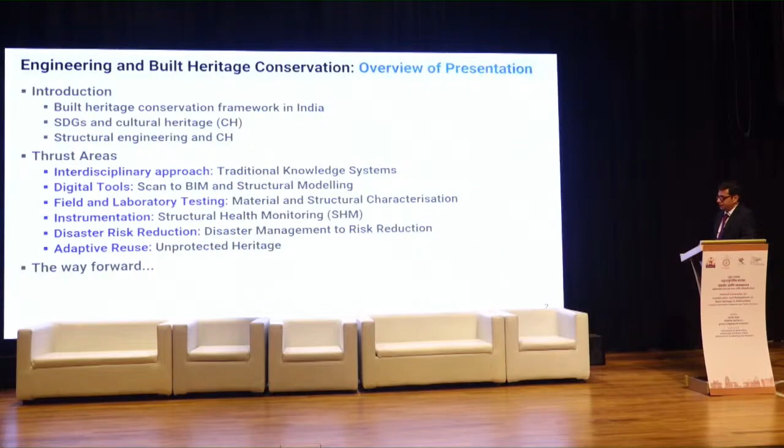And then I want to look at a few thrust areas, and I have listed 6 thrust areas here, which to me are fundamental in terms of built heritage conservation. So I'll be looking at one example each in each of these, and I really wouldn't have the time to go into the specifics of each of these projects, but just the essence at this stage. And wind up with the way forward for institutions such as the Directorate here in Maharashtra or any other implementing agency, national or at the state level.

So let me look at this, and all of you are related to the subject of built heritage conservation, so I wouldn't have to go too much into this aspect. We know that in a country like India, we have a very large stock, nationally protected monuments reaching as many as 4,000 and 42 World Heritage Monuments at this stage. There are state archaeology departments across the country. Tamil Nadu, for example, has about 88, and if I'm not wrong, it's around 380 in Maharashtra. And these are not single structures, but multiple structures in many cases.

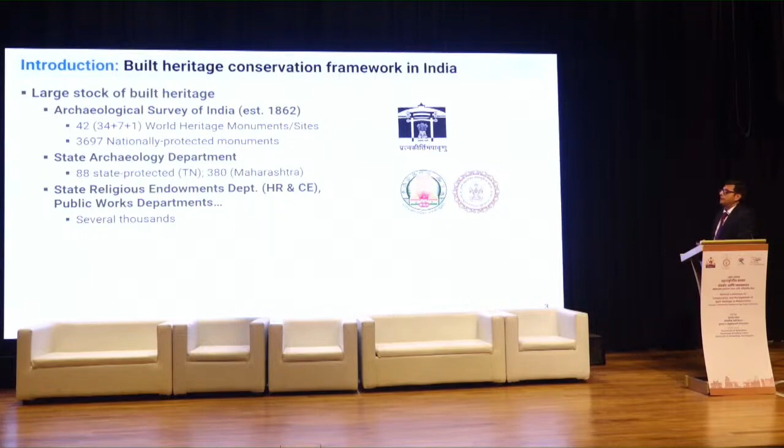Apart from that, there are other departments which have very valuable historical structures. The state religious endowments department is one such example. Waqf boards, another one. Public works departments across the country also have several thousands of historical monuments and heritage structures under their purview. We, of course, have many more under no formal institutional framework, and NGOs such as INTACH or in Chennai, Reach Foundation, really work to address this big gap that exists in the domain of unprotected heritage. If you look at built heritage, they do present augmented vulnerability to natural disasters, and that's something that all of us are aware of.

For me, I started my journey, I would say, not career, as a master's student in the first semester of 2001, and the Bhuj earthquake had just happened. And it's one incident that really brings to fore the issue of vulnerability to natural disasters in monuments. Kutch district with more than 15,000 heritage properties, it's recorded that about 2/3 of that was destroyed or extensively damaged. Well, the list doesn't stop there. You and I know that.

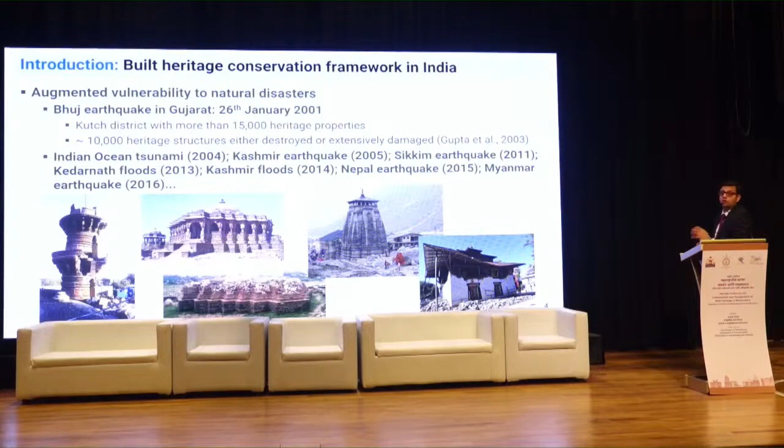We had the Indian Ocean tsunami in 2004, the Kashmir earthquake in 2005, Sikkim 2011, the Kedarnath floods in 2013, Kashmir floods in 14, Nepal earthquake in 15, Myanmar earthquake in 16, and the list goes on. And it's expected to go on. That's something we have to take cognizance of.

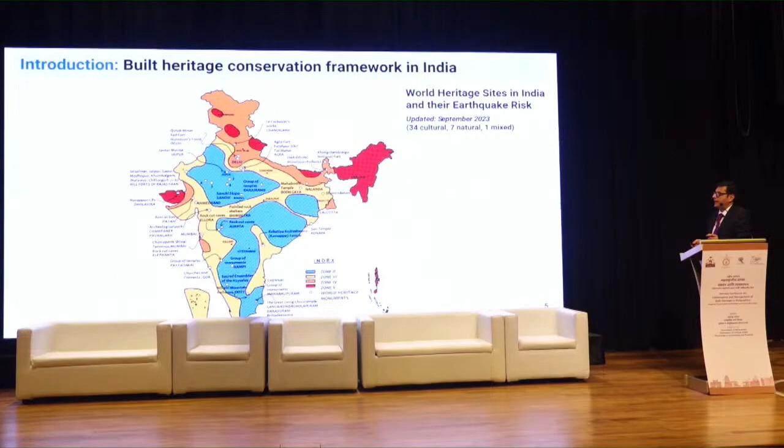In terms of statutory provisions, I think it's a room full of people who know the subject. I don't have to go too much into detail here. There are charters, international charters, which all of us are aware of. And as far as the nationally protected monuments, we have the AMASR Act and its amendments, and the National Monuments Authority since 2011, which looks at aspects such as bylaws and permissions for changes in and around monuments.

The National Conservation Policy, two important aspects that for built heritage conservation we have to keep in mind is it specifically requires, and not many documents internationally have ventured into doing that, that monuments of national importance have to be scientifically assessed and retrofitted. And mind you, we are talking of 3,697 monuments. It's a huge number if one were to systematically address all this.

Conservation efforts at all monuments, and those of you who have prepared conservation management plans are aware that disaster management plans also have to be prepared for each monument. That's a big ask for the number of monuments that we have in this country. State protected monuments typically follow a similar pattern, and each state has its AMASR Act. Tamil Nadu had its Act in 66 and 71.

And then, of course, there are recent important guideline documents on disaster management. The National Disaster Management Authority with the Home Ministry has come up with National Disaster Management Guidelines for Cultural Heritage Sites and Precincts in 2017, and another document for museums in 2017. So these are acts and guideline documents for us to act within.

In terms of scientific assessment of risk in this country, there are lots of efforts, but I would think, given that we are 75 years from independence, our own knowledge on the structural behavior of our massive monuments is still limited and needs efforts to fine-tune, refine, and have a greater understanding. There are a number of international and Indian researchers who have spent decades documenting our monuments, but the focus has mostly been on historical and architectural descriptions.

One important aspect is, for example, the documentation of the Sri Jagannath Temple at Puri. We're not completely clear of the kind of structural details that actually exist in the triangular portion, while the Sthapatis would actually know how that can be constructed. Since that's a sealed off portion of the structure, we are not aware of the actual measurement within such a space.

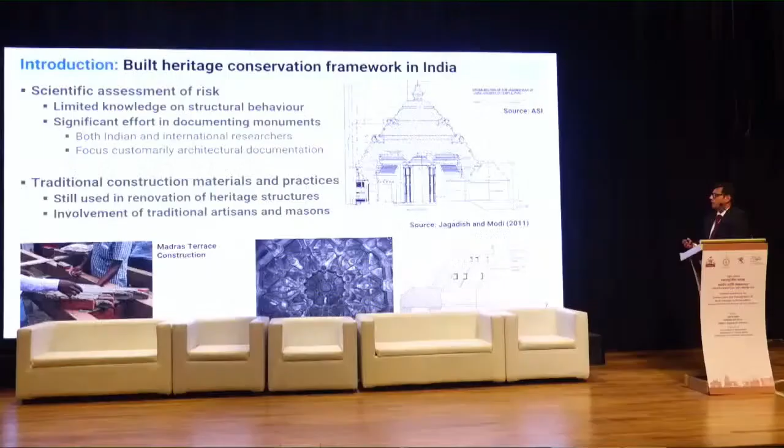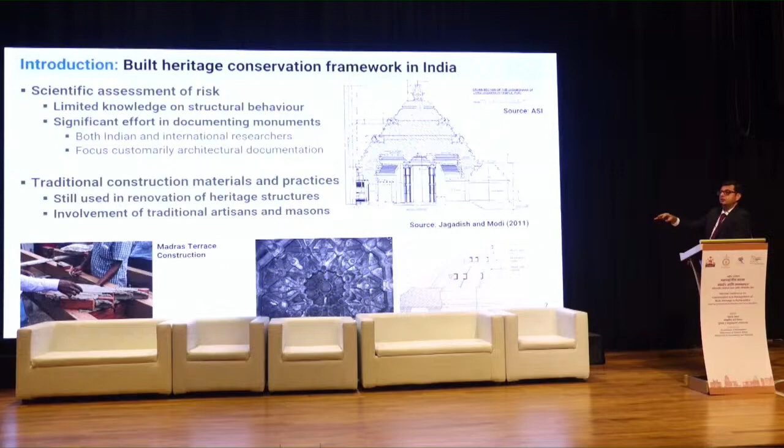The picture on this side is actually related to the previous point, which is limited knowledge of structural behavior. This is a very interesting document which talks about the domes of South India, and it is startling to see a 13th century dome in stone which, if you can see the drawing here, has a series of horizontal and meridional ribs. That tells us that in the 11th, 12th and 13th century, there was an understanding of how a dome behaves, and that with the provision of meridional ties you can ensure structural safety of this type of construction.

This, in the Renaissance period, was something that the Renaissance builders had to deal with in St. Peter's, Rome, and in the late 1500s had to go and put chains around the St. Peter's dome. But you can see that something has actually gone into the original conceptualization of the structure itself. So there's so much that we still don't understand of what our predecessors have actually done.

Let me come to some sore points. Heritage safety education, and I focus particularly on heritage safety education. In our country, I would say there's still a lack of convergence, and this is because of our colonial past, between modern day engineering education and traditional knowledge systems. This is a truth. We are making small inroads, or we have forgotten a lot of things, but still there is lack of convergence.

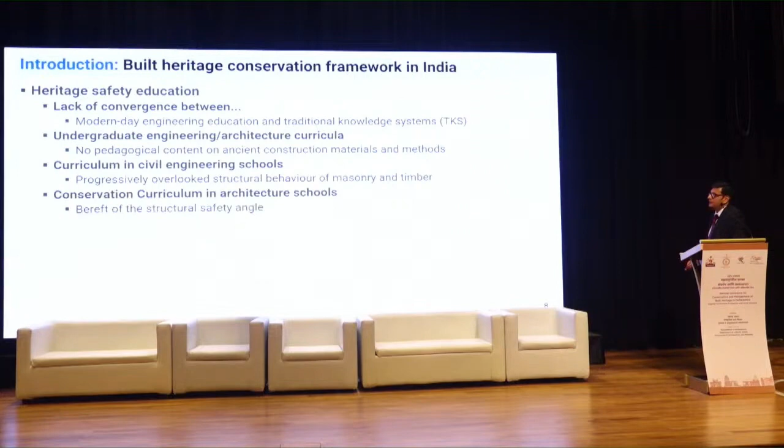from a fundamental perspective. The conservation curriculum in architecture schools is typically bereft of the structural safety angle. There may be exceptions. In expertise in safety-centric conservation engineering, in our country, we don't have the critical mass. And that, given the number of monuments we have, is a big challenge.

Heritage safety practice, education versus practice now. There's limited infrastructure with state agencies, and this could be the reason for not undertaking R&D in subjects like structural safety of historical monuments. In the conservation efforts in the private sector, there's a real need for better synergy between architects and engineers if this subject has to move forward in the right direction. And structural safety is not typically in focus. And quantitative approaches are seldom taken.

Most interventions in heritage structures happen post-disaster. We don't do too much of retrofitting. At best, we do repairs. They are often unscientific, ad hoc, semi-engineered, or non-engineered. We don't invest in pre-disaster retrofit. Most often, it is post-disaster. It's disaster management that we are doing. We're not doing disaster preparedness. This requires a comprehensive program, and you have to be at it for decades.

In the current efforts in capacity building in conservation engineering, there are isolated efforts of research, but academia is often told that you're not giving us implementable deliverables. You do all the research, but we're not able to implement what you're doing. So there's a disconnect between academic institutions and implementing agencies. When I say implementing agencies, I mean ASI and departments of archaeology and other endowments departments and so on.

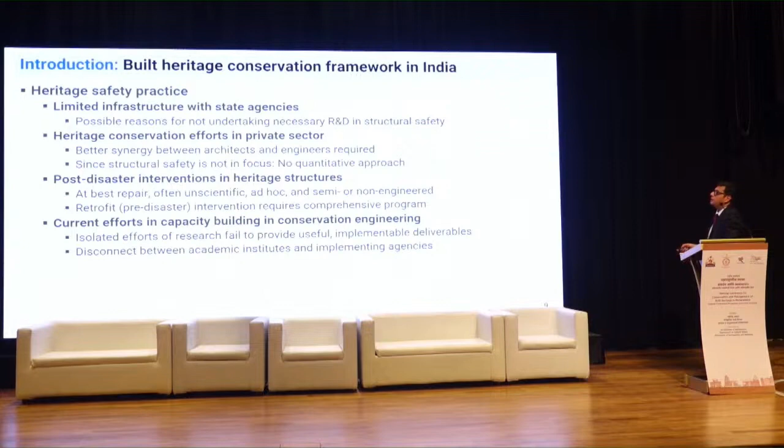So moving forward, I would like to talk of a few things which then lead me to the core thrust areas. This is an important document, and Dr. Shikha Jain, who's here, is one of the authors of this document, which was submitted to NITI Aayog, the working group report on improving heritage management in India, in 2019, and it sort of sets the vision for India's immovable heritage. It's a very broad document that gives a way forward for what our country should actually do.

And the key word here is this is a development tool for socio-economic upliftment. I think all of us in this room recognize that, but here is a NITI Aayog document that actually nails it. Moving on, there's this sentence that I just wanted to read out: an all-encompassing, inclusive, multi-sectoral, multidisciplinary approach involving the entire gamut of heritage stakeholders is called for, from the myriad custodians and the range of heritage experts to the visitors as well as the citizens of India. This is a fantastic document. Please take time to read it because it does justice to India's concept of democracy, right?

Moving on, I just wanted to talk a moment on the SDGs. All of us should be aware of the SDGs, Sustainable Development Goals of 2030, and where is cultural heritage sitting within this? The SDGs recognize culture as a global public good and a critical enabler and driver of progress towards SDGs. In particular, and I'm not going too much into the details, it's SDG 11, Sustainable Cities and Communities, which requires us to strengthen efforts to protect and safeguard the world's cultural and natural heritage. And there are specific indicators that we need to take care of.

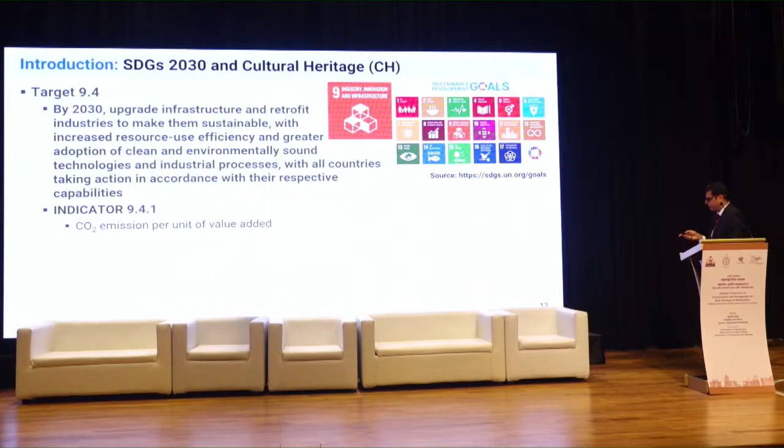The Sendai Framework for Disaster Risk Reduction, again a document that all of us must be aware of. The Disaster Risk Reduction documents 2015-2030 also talk about the place that culture has, the cultural resilience of people, in the context of the assets, the cultural assets, the persons, communities, and their countries. So this is, again, something that links to culture in the context of disaster risk reduction.

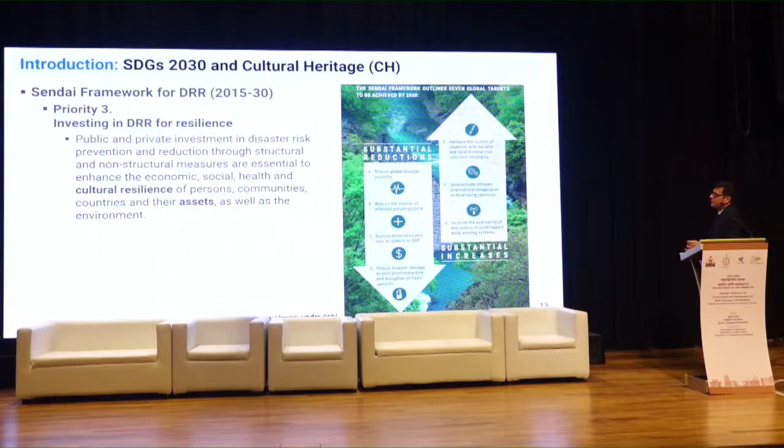And coming to structural engineering, there is one aspect that I mentioned the other day, and this is ISCARSAH, the International Scientific Committee on the Analysis and Restoration of Structures of Architectural Heritage. We have an NSC-ARSAH, National Scientific Committee in ICOMOS India as well, and they give recommendations for the analysis, conservation, and structural restoration of architectural heritage. And in the guideline document, this is where engineering comes into the picture.

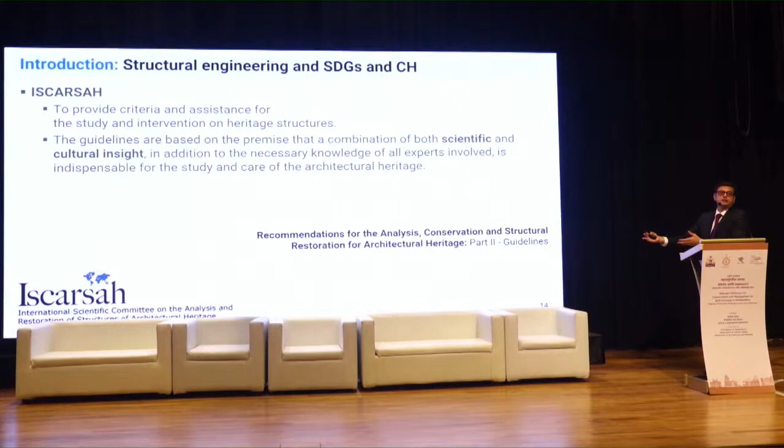The guideline document actually says what ISCARSAH does is to provide criteria and assistance for the study and interventions on heritage structures. These guidelines are based on the premise that a combination of both scientific and cultural insight, in addition to the necessary knowledge of all experts involved, is indispensable. In a place like Ta Prohm, a botanist has to work with an archaeologist and a structural engineer to actually think of a solution to the site. The necessary knowledge of all experts involved is indispensable for the study and care of architectural heritage.

And within such a multidisciplinary approach, yesterday we were talking about buildings having reached a limit of safety. Within that context, structural engineering can provide the scientific support necessary to obtain the expected result. And what is the expected result in built heritage conservation? Safeguard of the building as a whole with lowest possible consequences on the heritage values. And I think that's a guiding principle. And structural engineering can help you arrive at the right solution which has the least possible consequences on the heritage values.

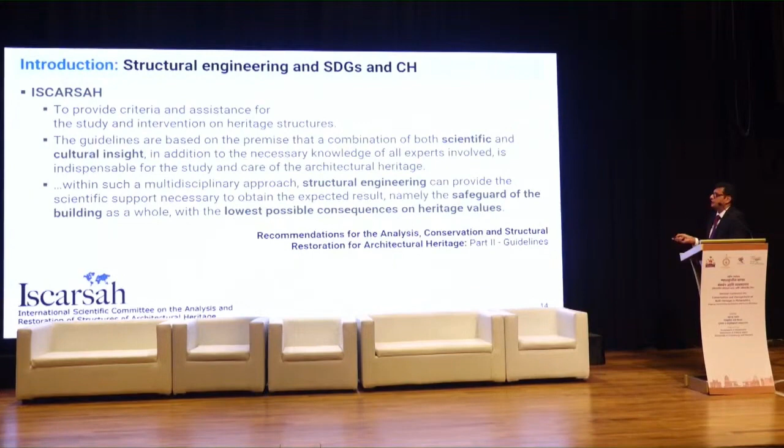The guiding principles are being rewritten now and revisited, and while doing that, there are new principles being talked about. You need to identify tangible and intangible character-defining elements, adopt a minimal intervention. This has already been there. We need to avoid an overcautious approach to assessment. When we don't know much, we tend to say, increase the factor of safety. That is the problem which will actually lead to a very heavy intervention, which may not be warranted in a structure of historical importance.

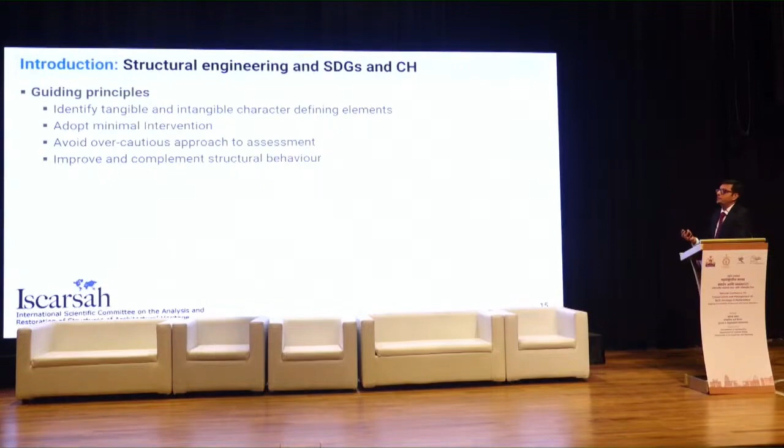We need to improve and complement the structural behavior. We must not have methods where we completely short-circuit the structural behavior, but ensure that the existing structural behavior is enhanced and improved, is helped or facilitated rather than completely bypassed. We need to recognize the limitations of codes and conventional approaches. The other day we were talking about how there are no codes in this domain. Why? Because these are not going to help you beyond an extent.

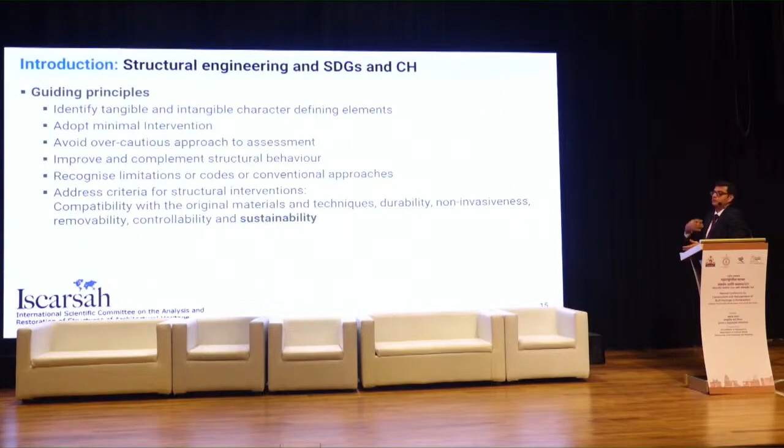We need to address criteria for structural interventions: compatibility with original materials and techniques, durability, non-invasiveness, removability after a period of time, controllability, and sustainability today. In the original guideline documents, we never talked of sustainability, but today we're talking of sustainability of interventions.

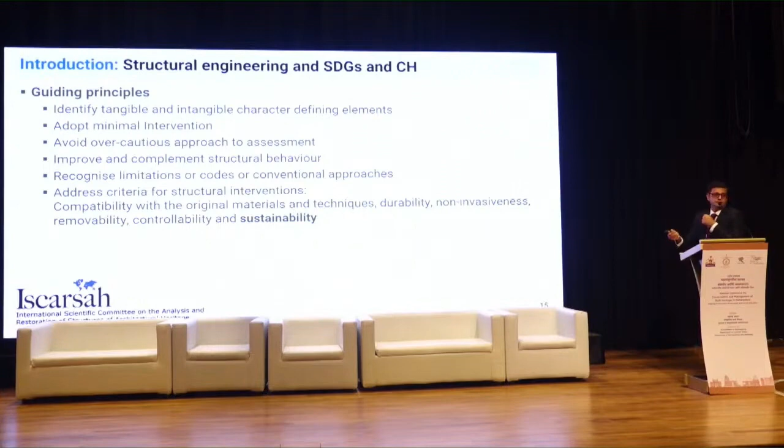Okay, so let me very briefly take you through these 6 thrust areas that I think are useful and essential over the next 5-6 minutes. Traditional knowledge systems and the role of modern engineering and architecture. The projects that I'm talking about are actually placeholder examples that we have actually worked on. This is an area that I think in India we must really work on much more.

This is a project in a place called Thukkatchi in Kumbakonam, a temple site that was not in worship for more than 60 years. That was the state of the entrance Gopuram, which after a process of multi-stakeholder involvement, restoration and renovation efforts led to consecration of the temple in September 2023. And this is a 12th century Chola temple in Tamil Nadu. This was taken up as a pilot project for structural conservation.

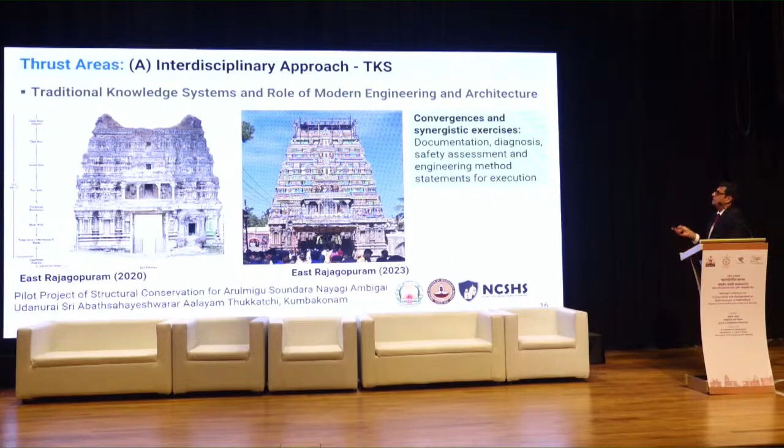And the key aspect here is the convergences and synergistic exercises that exist between modern engineering and architecture and traditional knowledge systems. And we were able to see a lot of overlaps possible in documentation, in diagnosis, safety assessment, and engineering method statements for execution that modern engineering and architecture can bring in. So this was a very interesting aspect if you work in religious sites, which was what we were really looking at

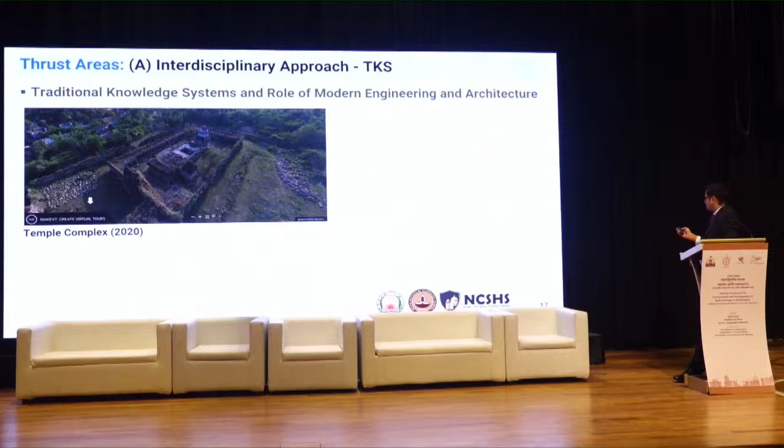yesterday. So this was how the site was until 2020. What you're seeing is a drone survey, and the picture that you see here is on the day of the consecration on 3rd September 2023. A very successful project because it came together through the period of the pandemic and was executed rather rapidly and given back to the society after a period of over 60 years when there was no worship happening in this temple.

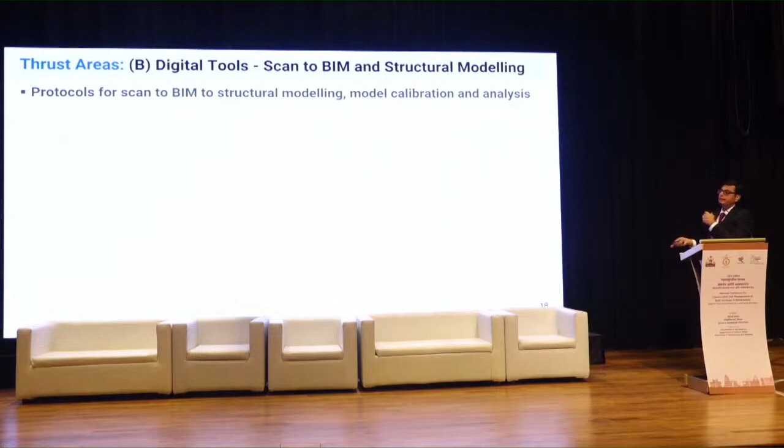The second aspect is a focus on digital tools. We are living in a digital era, and we do a lot of scan to BIM today. We do a lot of scanning, and we create models that we use for several purposes. Scanning to building information modeling for heritage structures is becoming a reality today, but we need to push it as engineers to another level, which is BIM to structural modeling. And we've been able to achieve that in one of the projects that we are involved in.

So this is an ASI protected site in Ahmedabad, and we were looking at heritage impact assessment of the Jhulta Minar, if some of you must have heard of, in Ahmedabad, and the brick minars of Ahmedabad, and this was done for the railways. So we were looking at the impact of the redevelopment of the Ahmedabad railway station, where what you can see is the scanned model is converted to a 3D model, and the 3D model is then imported to a structural analysis program, and the structural analysis program is able to do the necessary calculations to look at the impact of vibrations, the impact of excavations, and so on.

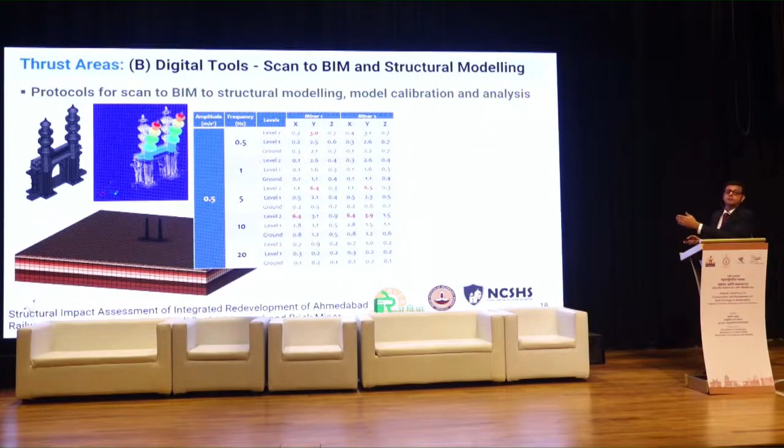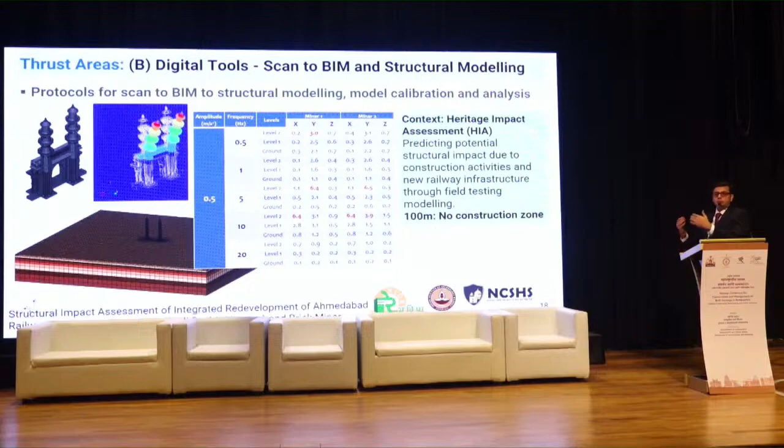So we were looking at if there is an excavation. This is a soil model with a monument model. If there's an excavation 80 meters away, what is the level of vibrations that we expect? And this sort of information is what can inform heritage impact assessment and a decision on whether or not a redevelopment project can actually be allowed in the vicinity of a nationally important monument. So this was one interesting project that we had done. And in fact, the construction actually happens within the 100 meters, which is the no construction zone. But the point is, to say no without a quantitative assessment versus a blanket rule is something that is debatable. That's the whole point.

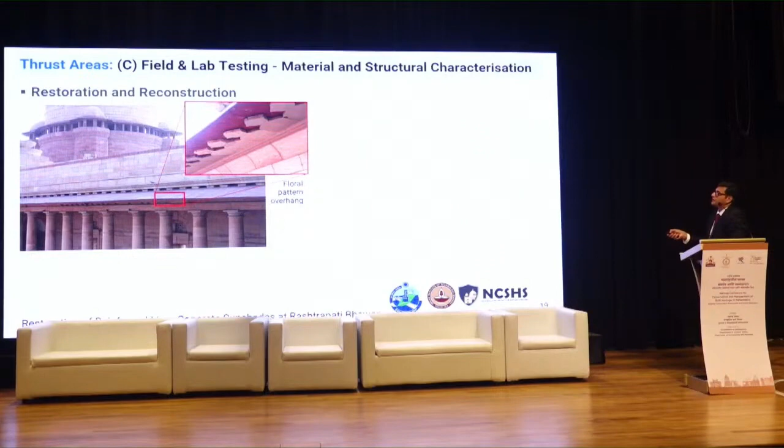A third aspect is about field and lab testing, because material and structural characterization is essential. And to support me was the answer that I had given in the morning session. This is the Rashtrapati Bhavan, the sunshades of the Rashtrapati Bhavan, which were very badly damaged due to deterioration of the lime concrete, and these are reinforced lime concrete sunshades. And over a period of about 4-5 years, we've actually worked with the CPWD and put in place a system of renovation of all the sunshades. These were originally, according to Lutyens' drawings, meant to be in sandstone with iron dowels holding them, but were finally executed in lime concrete with reinforcement sitting inside. And from day one, they started corroding. In 80 years, it was disastrous.

1.5 kilometers of the sunshade were shooting stars in Rashtrapati Bhavan, which was very, very dangerous for the entire staff and the occupants and visitors of the monument. This has now been completed in cement concrete, removing the lime concrete and reusing as much as possible the reinforcement of the original construction. And floral patterns had to be put in place and so on. So here, scientific investigation is really the basis for the approach to the conservation itself.

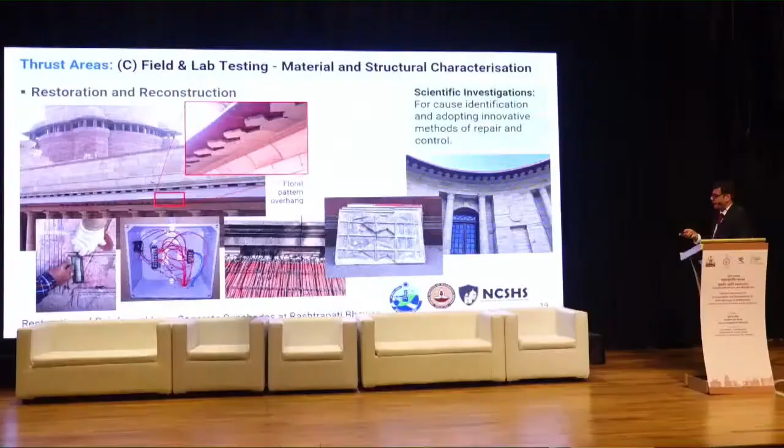And then finally, what we've also done is we've put in place monitoring and control. We actually have a system of health monitoring that has been executed for the entire stretch, which will tell us if there is corrosion and at what rate the corrosion is progressing, so that interventions can be carried out to curtail corrosion effects. The fourth one is on structural health monitoring, instrumentation for structural health monitoring.

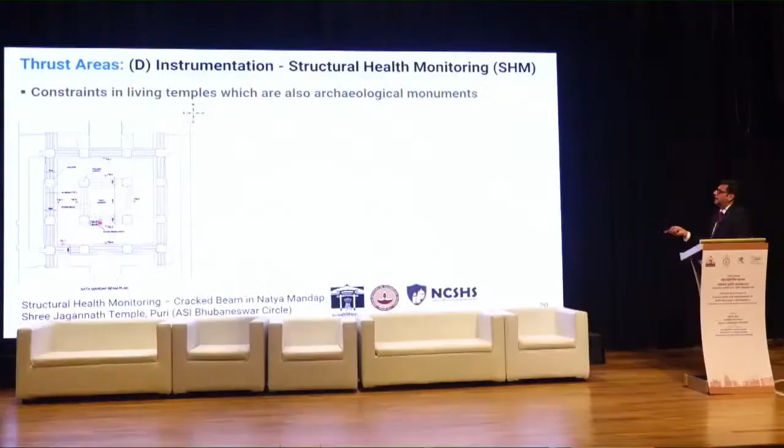This is an area which we really have to work in. We need collaborations with electronics and electrical engineers and computer science engineers, because there's large data that will come in. And in many monuments where there is a challenge of being able to take a quick decision on what can be done, or it's a very sensitive location, it is best to monitor and take decisions based on the data that you have. And here I'm giving you the example of the health monitoring of one cracked beam in Sri Jagannath Puri temple in the Natya Mandap, which has been monitored for a period of 6 years now, 2018 onwards to 2023 end.

And now decisions are being taken based on all the data we have on what should be the direction of intervention. And the data has really been useful to avoid a knee-jerk reaction in going and completely changing the character of an archaeological monument, which is a living religious site. So thanks to ASI's involvement, we were able to put in place and do remote monitoring. I do this monitoring from my room in IIT. It's wireless, it's through a GSM data card, and I'm able to collate the data and look at the performance of a cracked beam to be able to work with the ASI and then arrive at what should be the intervention itself.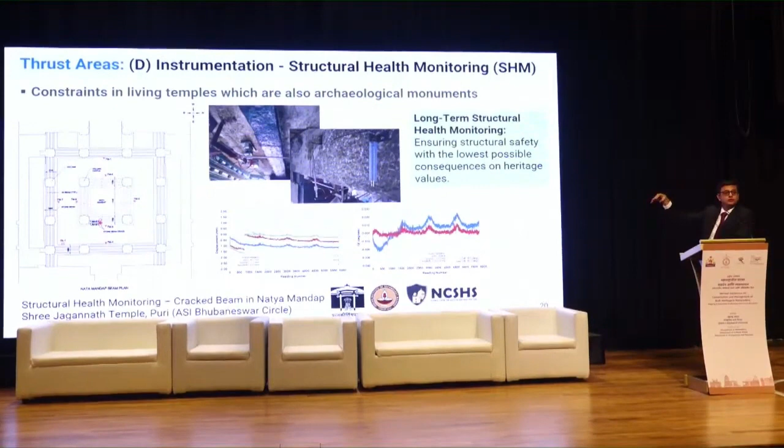So long-term health monitoring, ensuring structural safety with the lowest possible consequences on the heritage value. So this is what ISCARSAH was also echoing earlier. Health monitoring, again, in the context of developmental works.

Because of that, there were structural damages, of course, because of differential settlement, but there was constant monitoring, and let me tell you, there was monitoring for more than 7 years in this case. Of course, there were some temporary measures that were put in place, such as a temporary support for the cracked arch and so on.

So here, scientific analysis, scientific investigations, monitoring, temporary stabilization, control, and structural restoration and load testing, they really breathe new life into the heritage structure, which actually underwent a structural damage and created a lot of furore about whether it is safe or not.

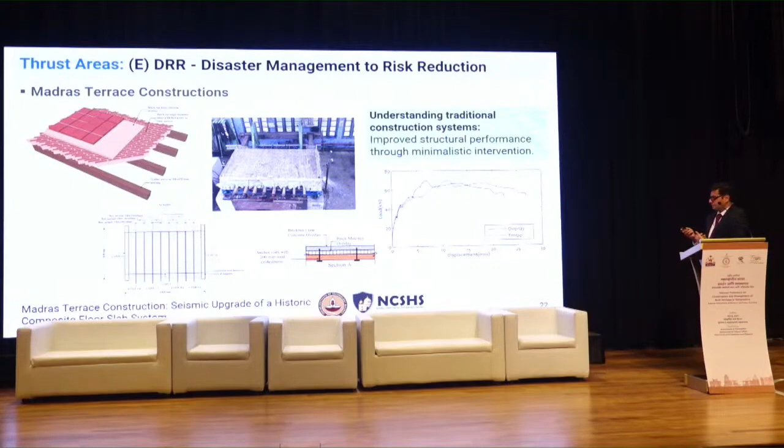So you need research towards understanding traditional construction systems for improved structural performance, but through minimalistic intervention. This final slide on the thrust areas is again related to earthquake resistance of historical constructions. And I'm very happy to put this slide here, because I can tell you I've been working on this for 18 years. And these things don't happen immediately. They need a lot of patience.

And the last part was a 3-year Department of Science and Technology project that we got between 2018 and 2021. The work actually started in 2007. But what we did is to understand how safe are these mandapa constructions, stone mandapas where members are placed one on top of the other, without any interlocking in most of peninsular India. If you go to Gujarat, if you go to Nepal, you will see these constructions have iron dowels, or ball and socket joints. But in South India, you don't have any earthquake-resistant features.

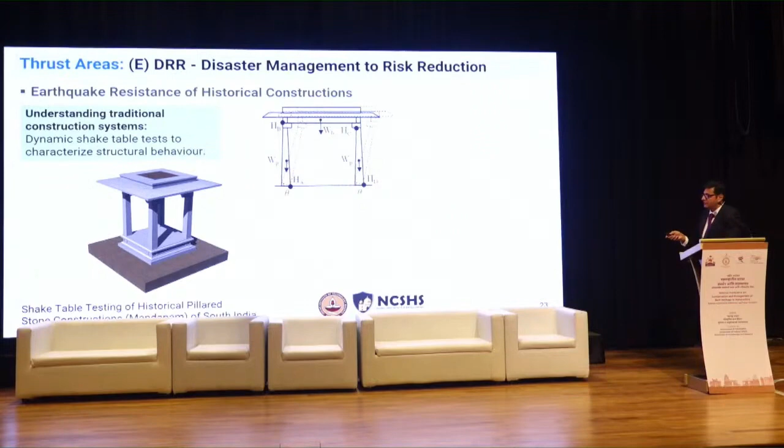But the point is, these structures are meant to last for 500 years, 1,000 years, and rare earthquakes can happen. So it was research interest to understand the earthquake resilience of these constructions. So we constructed, this is the shake table facility, an earthquake simulator at IIT Madras, which was funded by the Ministry of Education for the National Center for Safety of Heritage Structures to study the behavior of structural systems in historical monuments.

One of you might have to just click that.

So this is the test that we had conducted on a prototype built by a Sthapati on the shake table, and the test is underway.

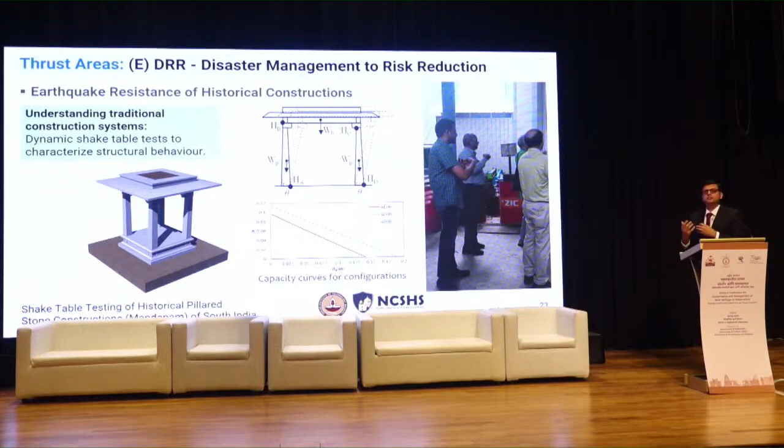And very little was sufficient to bring the whole thing down because there is no interlocking. But then, for the level of earthquake hazard that is there in peninsular India, we have quantitatively demonstrated that these constructions are safe for the level of earthquakes that peninsular India can actually experience. So a quantitative approach, but along with a qualitative approach, is fundamental in fields like this, and R&D is essential.

So let me close. I've taken 5 to 10 minutes more than I'm permitted.

The way forward, I have to put on my hat as a professor here, and I think the way forward, even though it is not the fastest way forward, is education and capacity building. And in that context, we need to invest in education and capacity building. For government agencies responsible for heritage conservation, I am not a big fan of outsourcing. In-house capacity development is vital, particularly for engineering cadres within such organizations.

Wholesale outsourcing has limitations. It's possible to outsource parts of it, but it's important to have in-house competency so that you can engage with the agencies that you're outsourcing it to in a more critical manner, and you accept only things that really are essential for the organization. We need to focus on collaborative R&D between implementing agencies and educational research institutions. It'll bring a lot more meaning to the research that our institutions are doing, and it will be of a deliverable nature because of the collaborative nature of the research.

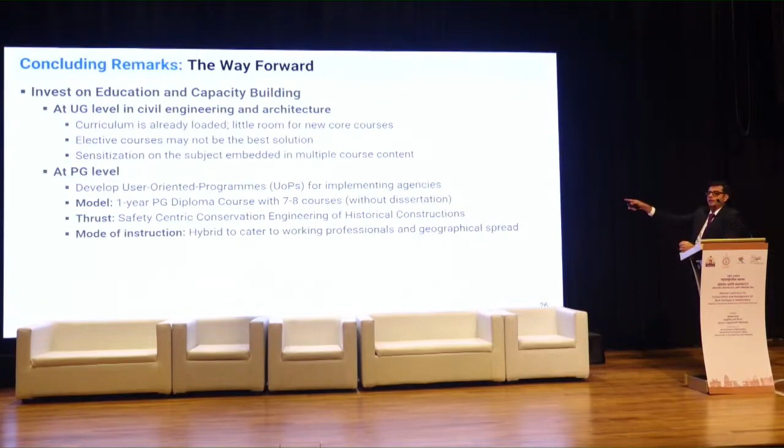I think it has advantages, so it will be hybrid to cater to working professionals who are actually working in implementing agencies, and also for the geographical spread. Because to expect someone to come from the Northeast to Chennai just for one course is not fair, when someone from Bangalore can come in much faster. And this will also address the private job market through some additional seats, but primarily it will be run as a user-oriented program for the state and central implementing agencies. And this will be conducted by IIT Madras through our center.

Sorry about that, but thank you for your patience, and I hope to have some feedback on the directions that we would like to take. Thank you.